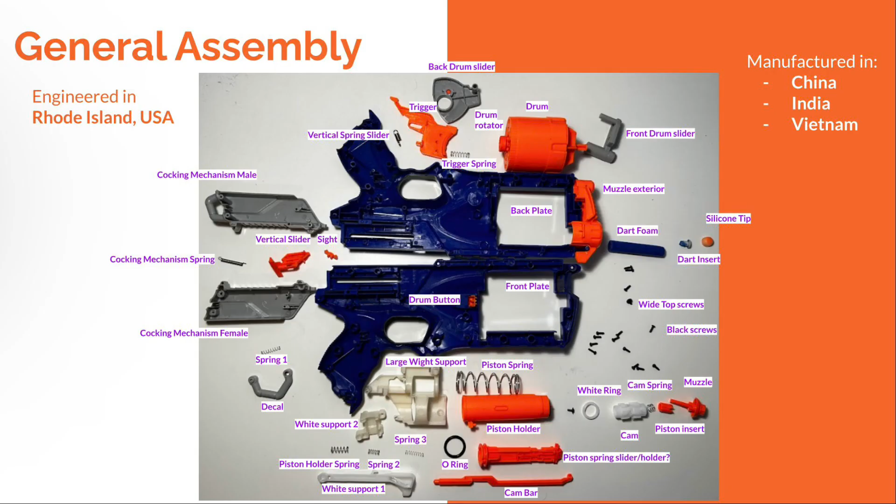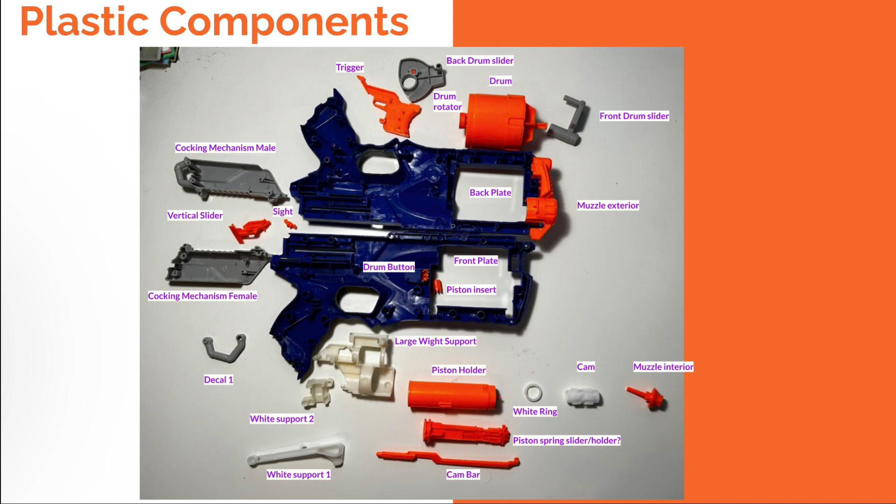And today we are going to be examining the Nerf N-Strike Elite Strong Arm Blaster. This is the general assembly of the Nerf gun. As you can see, it's mostly made out of plastic, but it also consists of screws, springs, and foam for the dart.

Taking away all other components of the Nerf gun, these are all the parts that are made of plastic. And if you take a deeper look into the plastic components, as you can see on the front plate right here, it's not difficult to see that it is injection molding. There are tapered lines and there are sprue removal marks, which is a clear indication that it's injection molded.

And the reason why you injection mold a part like this is because it's efficient at high productions, it is repeatable, there's low cost to make each part, and it reduces the post-production work you need to do with the Nerf gun. Alternative methods that you could potentially do is 3D printing, but economically it wouldn't be as viable and it would cost significantly more to do so.

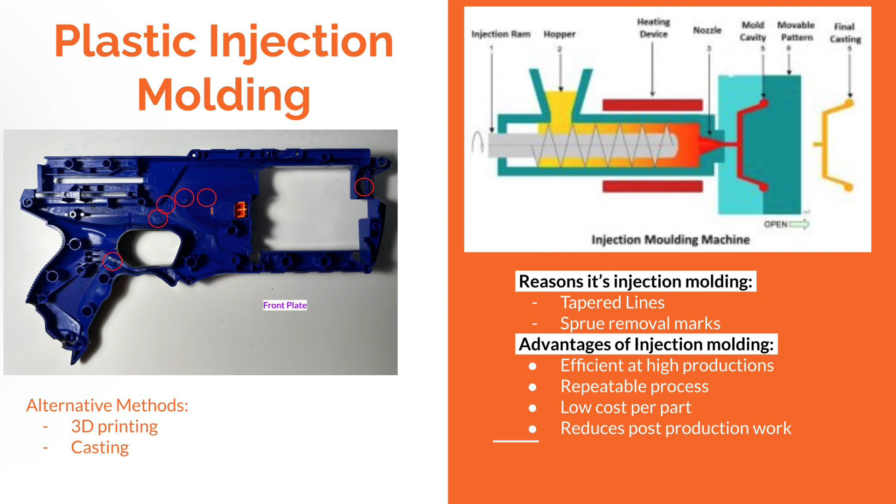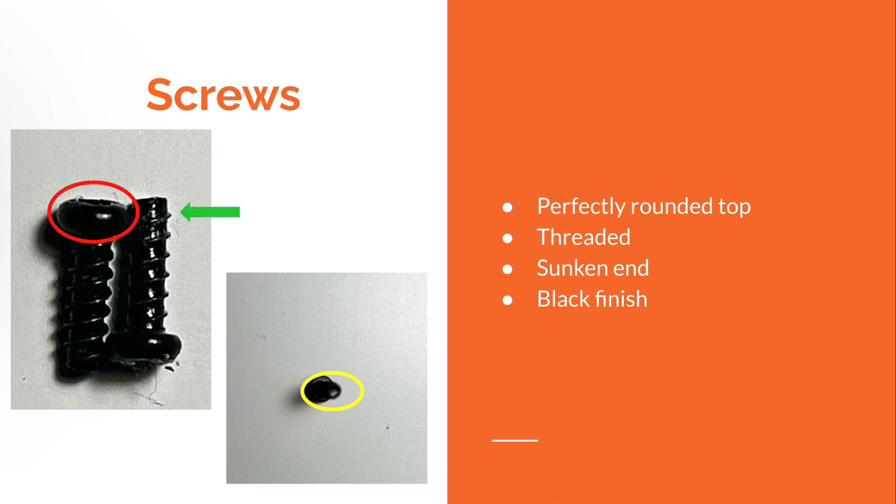We determined that the screws were made through cold heading then thread rolling. Cold heading would have given it that perfectly rounded Phillips screw head top, and thread rolling would have threaded it while also giving it that sunken end from the material that was forced down, and that black finish could have been a black oxide coating.

Some alternative methods that were considered were machining and plastic injection molding. Machining is popular for threaded components, but it's harder to machine stainless steel, and it wouldn't have that sunken end from being on a lathe. And plastic can be pre-colored for injection molding, but it's just not as cost effective when you think about how cheap these screws are.

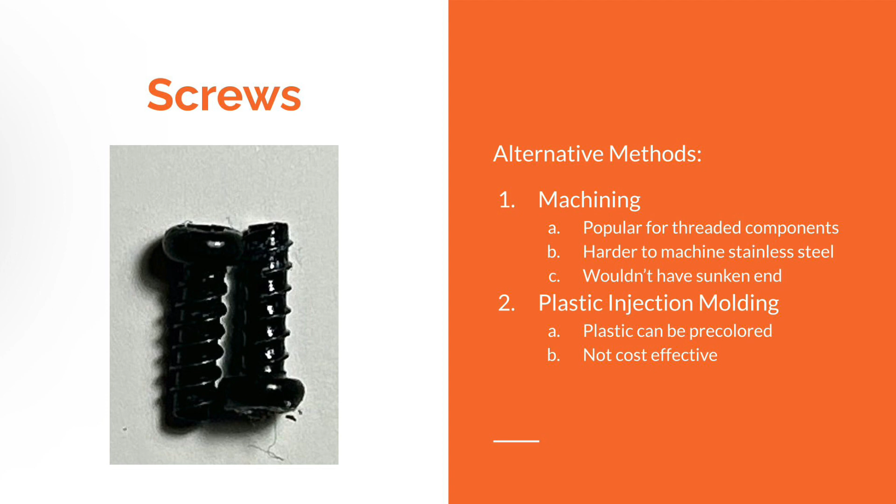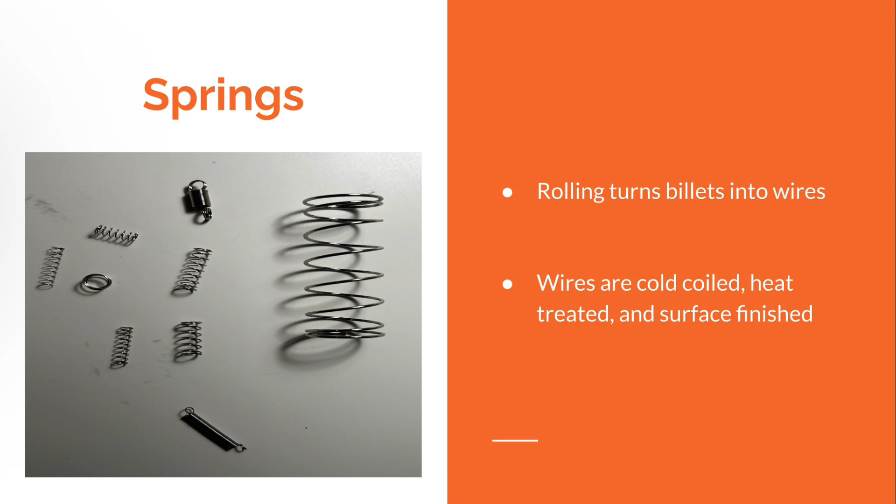For the springs, rolling turns billets of metal into wires. These wires are then cold coiled, heat treated, and surface finished based on the specifications needed. Some possible alternative methods to springs are bending and stamping. But the main con is that both methods only work on small springs such as the one shown on the left. And the spring shown on the right is much too long for bending and stamping to be effective.

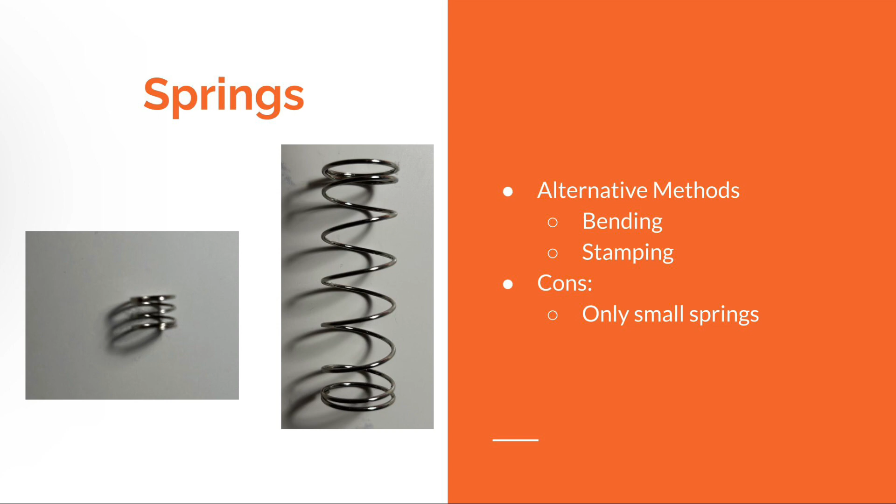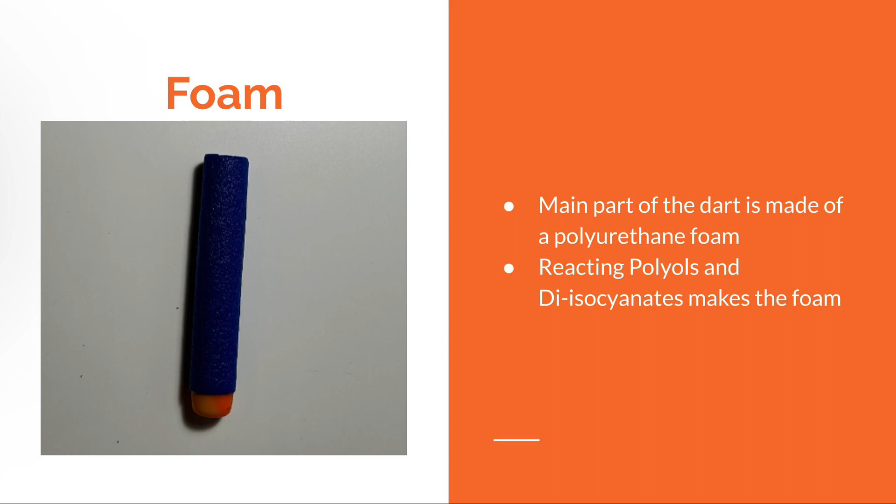For the Nerf dart, the main part of the dart is made out of a polyurethane foam. Polyurethane foam is made by reacting polyols and diisocyanates. To manufacture these darts, they have to go through a process like the polyurethane foam process. Diisocyanates and polyols are mixed together, then they are molded/cut, and then they solidify to make the dart. The assemblies at the bottom, as you can see, are made out of silicone, glue, and rubber.